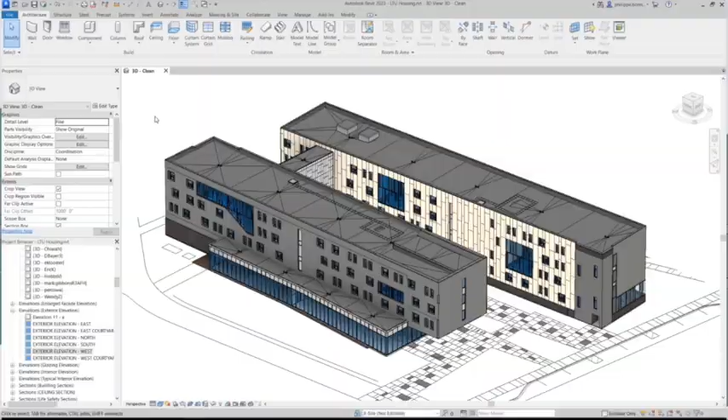You know, I worked for that MEP firm for 14 and a half years. I know what was in those models. I don't trust that data.

We've had drawings like this, we've had views like this, we've had data like this, but is it truly usable? Can we break it down? Can you break it down without opening a Revit license? Would you like to be able to break the models down without being able to open a Revit license?

Revit's complicated, is it not? No? Jim, come on. So I've run Revit MEP for a long time, and I still have not completely perfected it.

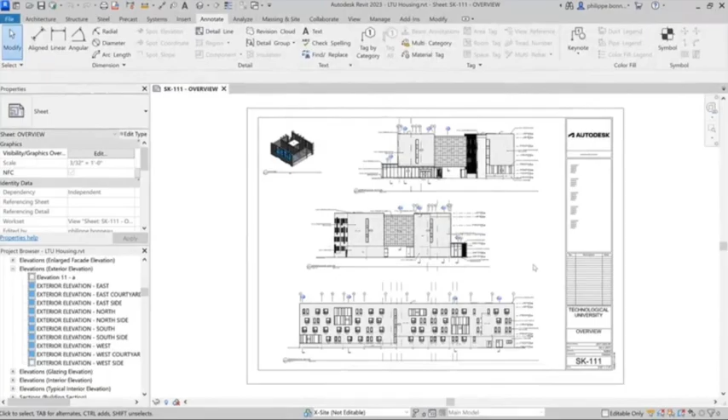I can do some great diagrams like this, draw some sections, elevations, draw a floor plan. I can draw a fire sprinkler system. But that was what I did, that's what I do. You manage a facility, you manage space. You shouldn't have to be a BIM expert to use our software and to use our models.

And that's where I'm trying to address Autodesk and my leadership: we need to make a tool that owners can use that don't have to know how to do a deep dive in our software. Does that sound like something that is truly needed, right?

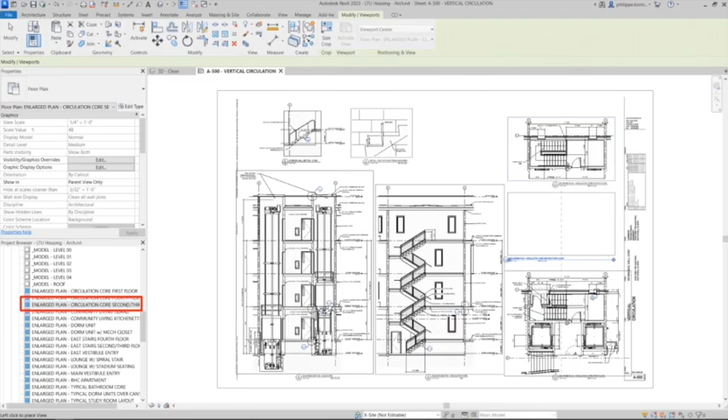So, all right. So what if I can turn your models into this? Let's see if it'll play.

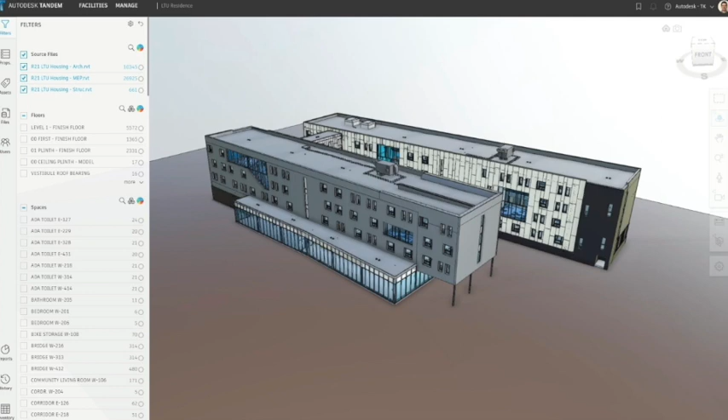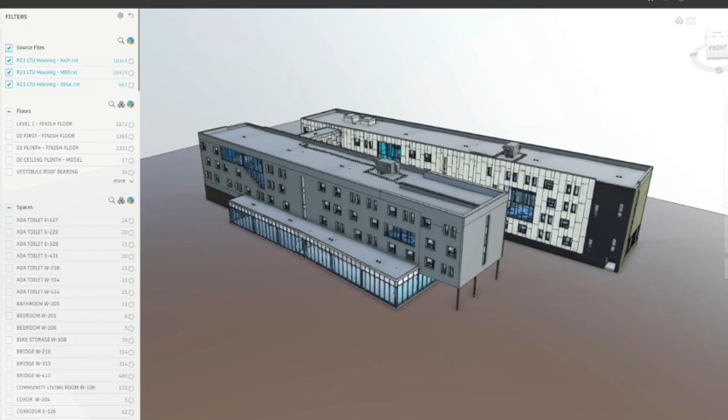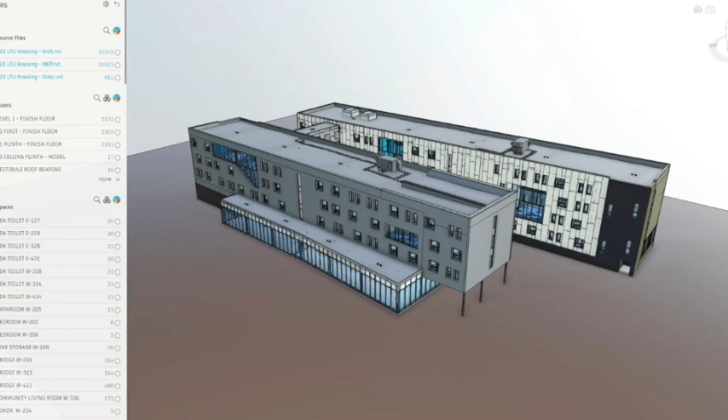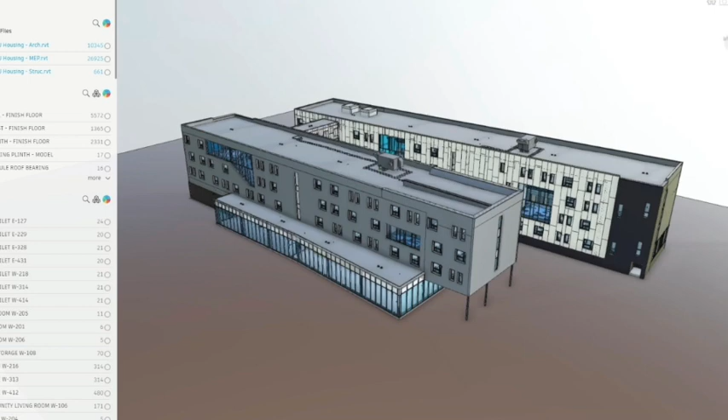So we realized that, hey, there's going to be things that are not modeled, right? Because sometimes we want a level 300, maybe we may want a level 400, maybe we may want a level 500. But what if we've got an existing building that we just want modeled to 200? Just for geometry, we can use this approach inside of that for a digital twin.

So basically a digital twin, or the transformation, is really happening. And what we're seeing in some other industries right now is this becoming the heart of business strategies. I'm going to Dublin next week to work with a very large IT firm on their digital twin strategy, looking at enabling the data, truly using the data from the models and from the building commissioning.

Connecting all of that information together in one unit so we can get to different places. This particular company uses 9 different systems to manage their campus, and I'm sure most of you have that or more. How do you access them? Do you access them all from one place? No? So what if we could give you a way to access some of that data through a digital replica? That's where we're going, that's what we're trying to do.

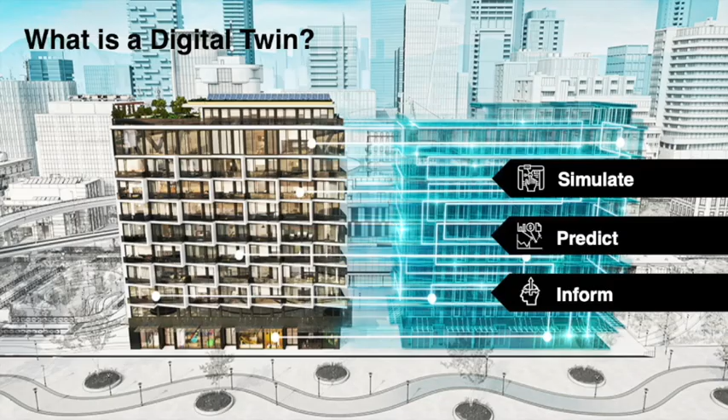Many people have different definitions of a digital twin. Autodesk's is basically a digital replica of the built environment. I leave your interpretation up to that. But what we want to get—sorry, I'm not used to holding a microphone, I got to talk with my hands—is to be able to simulate that building as it's sitting there in the built environment, or even during construction.

So the way we are looking at our digital twin is it starts at concept. If we've got geometry, we've got enough to start the digital twin. Then we can start building through DDs, at 100% DDs, 50% CDs. We can bring that model in any time so that we can start simulating what's there.

Then we can start predicting information. And then in the future, we're going to start predicting maintenance, predicting crowd flows, workflows. Then we're going to hopefully have the Inform tool in the digital twin.

So how many of you have TV views up that monitor your CMMS, monitor some of your other systems, your BAS? What if we could have TV views up with the twin that lights up when our systems go out of tolerance, when we get those alerts?

So that is what we're trying to build with this, and then we're trying to transform all that into the built asset by tying the commissioning, space planning, maintenance, performance tuning, and having a really good asset portfolio. And a lot of times we misconstrue the asset as just mechanical, electrical, plumbing, fire.

The predictive is where we start looking at the maintenance and what's going on in the building. Then the comprehensive is where we have everything working, flowing, and functioning. And then the autonomous is where the building is learning itself and suggesting ways to maintain and operate that building. We're currently in the descriptive and informative stage right now.

So that's where a lot of companies are in the process. And this is one of the things my boss and I talk about—all this data that you get, all this data that Andy hands over to Joe, how much of it does he truly use? Joe has it pretty defined what he wants, but there's more data that you hand over to Joe than he truly needs to operate.

Where does all that data go? What all happens to it? So we need to make sure we're finding ways to get that number lower, because you need this data for more than just operating. You need to have this data for the future of the building—40, 50 years.

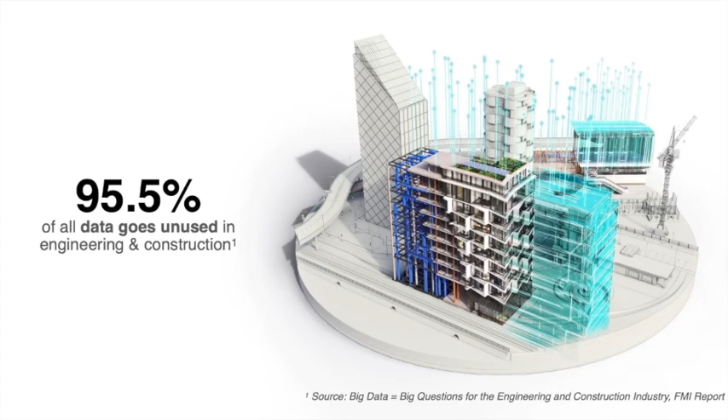I've got one client telling me he's got 60-year buildings that he's planning on. We need the data, we don't need it to go to waste from construction. So we've got to figure out better ways. And part of that digital twin is I want to get away from this—you get data on jump drives, or CDs, or handed over in the cloud. Is it organized? Is your O&M in one file, or is it multiple files broken out by asset type and by manufacturer?

So what we want, or what we're trying to get to, is a digital replica of that building with your data organized.

How many hours does it take you to get your CMMS up and running on a new facility or a renovation? Anybody? 6 months, a year. 2 months, 1 month. I know you get yours up and running pretty quick, right? Because yes.

10 seconds at the latest. And that includes all your maintenance schedules as well. Gotcha. So if we can start organizing that data as well, that's what we need to do in a truly digital format.

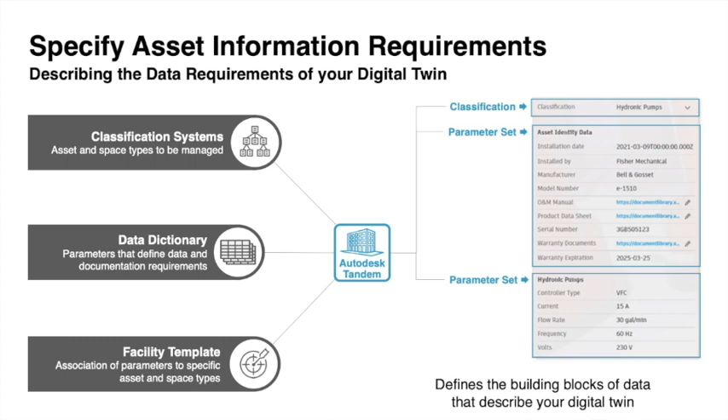But we start this with capturing the design with the design models. So you say, how do I start my digital twin? It's as easy as drag and drop that Revit file into our software, and we consume that file and basically explode it. We break it down even to the number of pieces of sheetrock, even the sizes of pieces of the wallboard.

And what makes it even easier is if you've got Terra here with the Docs and Build platform. If we have those platforms up and running, we can actually have those models being designed and it still be in the digital twin, and you starting to add data to the digital twin. That's how we can do DD, CD stages.

Now you can also do this from your servers. I know we got one client here where their models are all on their servers and not the cloud, and so they update those manually. And then the installation and commissioning data and solutions, Autodesk Build, Excel. So how many of you use Autodesk Build?

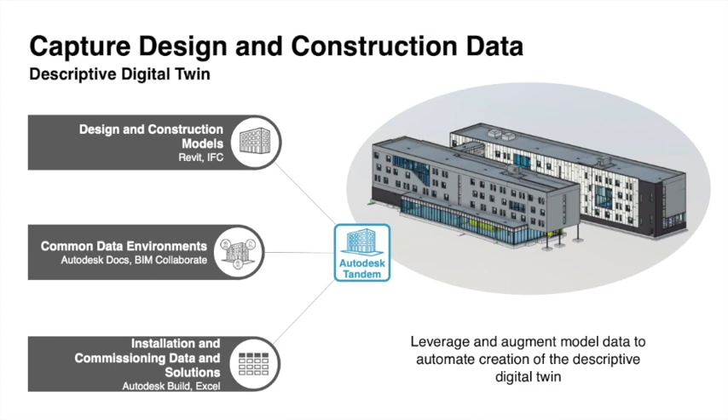That's our goal, that's what we're working toward - to tie all this together and use that database to populate your systems into the digital twin. Say a change is made in your space management tool, in Archibus, it changes in FAMIS or in Maximo. We realize you use many systems, so that's what we're trying to do. Is this a decent path to go down? It's not going to be easy, but that's my job, to make this easier for you. We've always looked at assets and asset data, but have we ever really looked at how all that system works?

We know because we've managed buildings for years. We know what's connected to that VAV box, what system that's tied to. We know what's connected to that air handling unit. We know what's connected to that pump. But to be able to visually see it adds tremendous value.

How many of you have changed jobs over your career? Walked into a building or campus you've never been in before or never worked in before? What we're going to do is give you access to data like this in an easy, non-Revit format, so people can start using the 3D geometry in your buildings to learn those buildings and use it during training of a new hire.

Our senior staff has a lot of knowledge that's nowhere else, and we've got to start capturing that data. Our staff, our techs, know the asset systems and spaces - they know pretty much how it's connected. Or the good ones do, right? So we've got to start capturing all this data and tying it together in ways like never before, so we can get a better result.

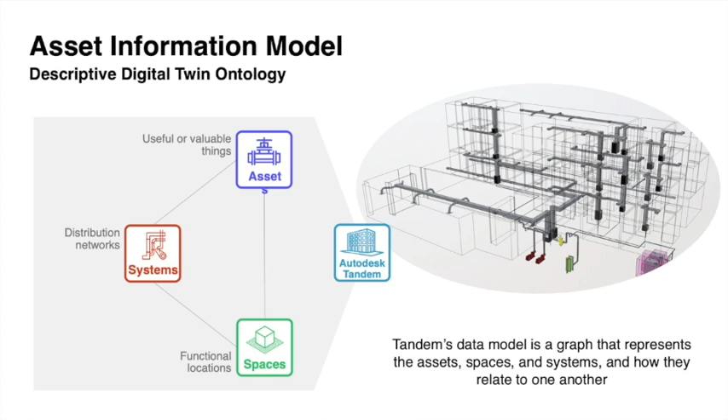And then hopefully what will happen is we all start becoming more transparent. I know we've talked about transparency for years, but we get the owner, the architect, and the contractor all working toward a similar goal. We educate, we understand - like Joe and Andy. They've educated, they've worked the system, they're getting this down to where it's becoming the deliverable and accelerating operational readiness.

One of the things I did for a hospital in Arkansas - we used a similar approach, and we got O&Ms, 60 gigs of data, delivered 92 days before they ever saw a patient on that campus. So it can be done if it's applied in the correct way.

Andy, we also got that contractor paid when they handed over that document, instead of after the contract was done or the building was opened. Yeah, there you go.

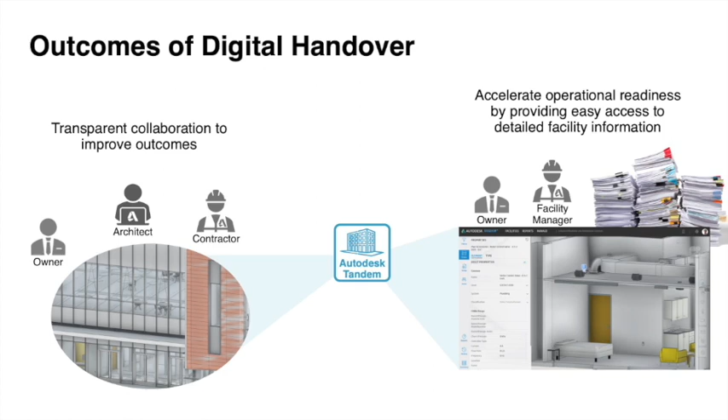So this is what we want to try to get to - delivering the twin to help you. And then once we do that, we want to transform the data and connect it all. This is kind of what I've been talking about - your operational solutions and data.

In the 3D floor plans, we'll be able to color code these by department, by your asset ID. I know Joe has OSU asset IDs - we can actually color code those by room IDs, whatever you need right there. It's all in the way we're handling the filters.

We can also bring in tickets, alerts, schedules, technicians. What if, besides your CMMS, we could pop up an alert in a room that says this room is out of compliance during one of your walkthroughs? Or you get your too-hots and too-colds in your dorms - what if we could pop up the area where those are too hot or too cold, to see if it's actually a person's fault or an equipment fault if we've got a whole line of rooms coming up, and have that visual graphic we've kind of been missing before.

So that's kind of where we're going - working with building management systems, lighting controls like Acuity Brands, space management tools like Archibus, Nuvolo, all of those. We want to be able to sync all that information up.

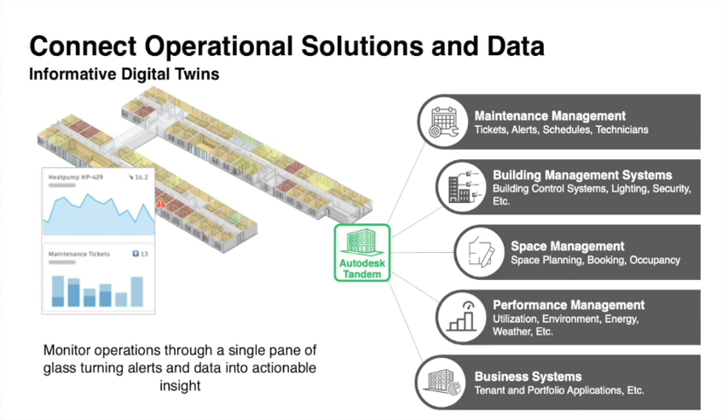All right, so I'm going to skip on through here. I want to show you our roadmap. Let's see if I can get this up. 15 minutes, okay.

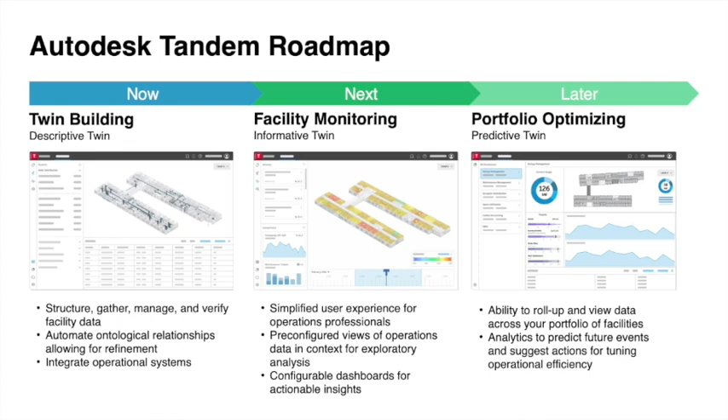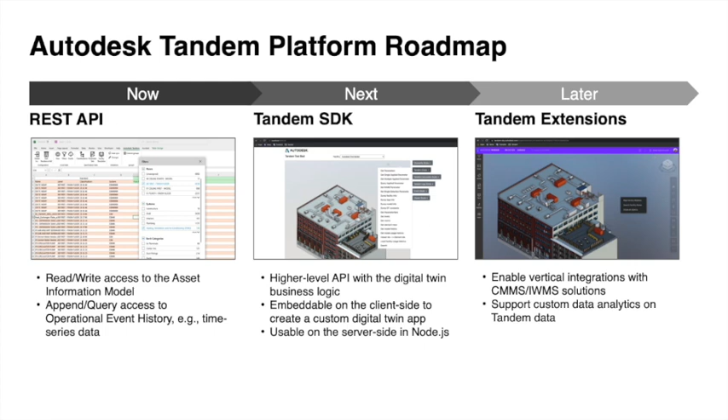That is our roadmap. This is all publicly available on our website for you to see as well, and you can actually comment and make suggestions on what you want us to work on directly on our website. So we're a little different than other Autodesk products - we're putting everything out there because we need your help.

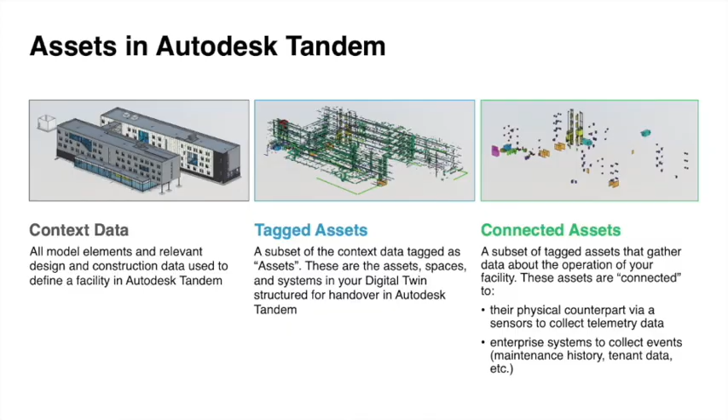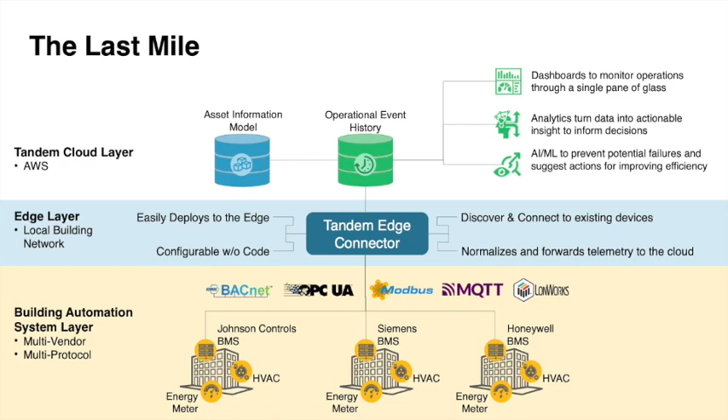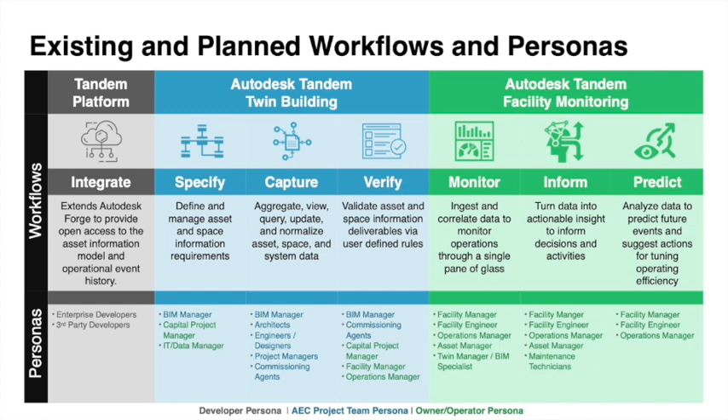We are currently right here in our roadmap. The monitor is to ingest the data - these are the personas that we are looking at. And then inform and predict is truly coming down the road once we get there. We're trying not to bite off too big a piece to put it out to the public at one time.

So, and that's view types, that's not views. That would be a 3D floor plan of every floor, a 2D floor plan of every floor, a space management floor plan for every floor, 2D and 3D. Same thing for all your systems, even your FF&E. You know, we can do all that.

So I'm trying to gather data from you to make this setup better and easier for you. So if you've got some comments, concerns - we're even going to need the GIS view inside of here. So I'd love to talk to you about it, because I need your help. That's the easiest way to say it.